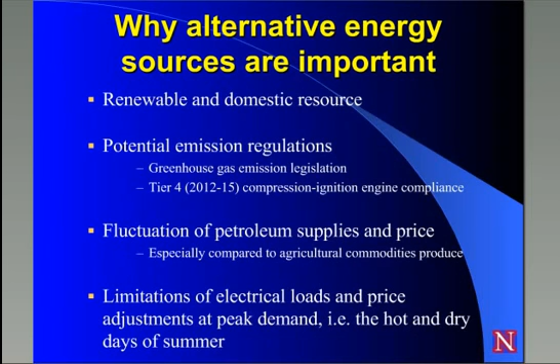Okay, so why are alternative energy sources important? One of the more obvious reasons would be the renewable domestic source. They also have the potential to reduce emissions, and that's important with existing regulations or maybe future regulations that monitor greenhouse gases, and meeting engine compliance, such as Tier 4 for a compression ignition system. The other reason would be fluctuation of petroleum prices and petroleum supplies. So that's just one other reason to look at that.

Specifically, if you're looking at irrigation and production for commodity crops, then if you would have an energy source that's tied to that commodity, it may be advantageous compared to something that's a petroleum-based product that may see spikes when your commodity prices don't rise. Now here recently, commodity prices have been tied much closer to energy prices due to the development of biofuels, so that's becoming a little bit less of an issue.

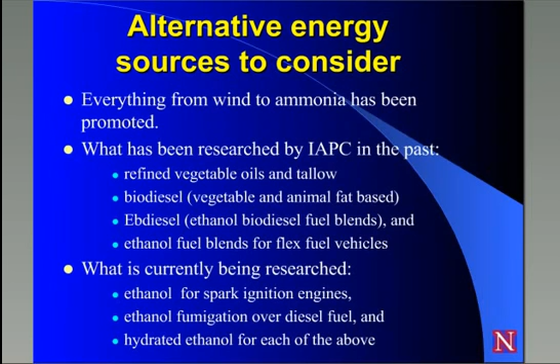But then specifically for the research project we were also looking at the limitations of electrical load and price adjustments at peak demand. And so if a producer was irrigating their crop with electricity, on the hottest days of the year, those are also the days that have the highest demand for residential and industrial cooling, and so the production applications may be limited on how much electricity they can use or the ability to irrigate their crops on the hottest days of the year. So that is a concern that some of the producers have, as well as the power generator. They're concerned about having capacity for people, or in some cases where they would have excess load and put limitations on their system.

As far as different sources to consider, if you review literature and things, many options have been presented, anything from wind to ammonia. And I listed those two as two that I find interesting, because when we think of it for crop production, I would rather be using the ammonia to feed the crop, and if I'm concerned about using electricity because I might not be able to produce on some of the hottest days, I would be a little concerned with wind as well, in that I might have to wait for the wind to blow in order to irrigate my crop. So lots of alternatives are out there.

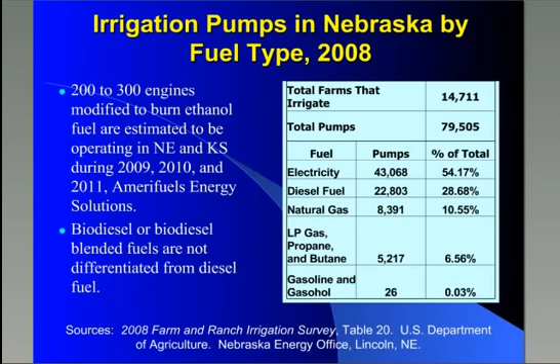Here at the Industrial Ag Product Center, we've looked at refined vegetable oils and tallows. We've also looked at the biodiesels from those feedstocks. We did some research in the past that looked at ethanol and biodiesel blends. This would be more along the lines of e-diesel, or in the study that we did, we looked at EB diesel. And then we've also done studies with flex fuel vehicles on the ethanol use of those various fuel blends as well. Currently, we're looking at research with ethanol for spark ignition engines, and then the fumigation of ethanol over the diesel into the compression ignition engine, and then hydrated ethanol as a source as well.

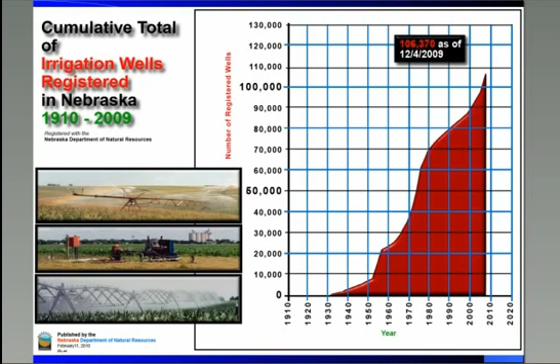So we'll get into some of that here, but I'll give a little bit of background information on why we looked at the irrigation industry here in Nebraska. That's that there's roughly 80,000 to 100,000 irrigation wells in the state of Nebraska for agriculture, and well over half of those are powered by electricity. But over a quarter of them are powered by diesel fuel, and then the remainder are either natural gas, propane, or gasoline. And the section for gasoline and gasohol, according to a 2008 study, is very small. It was less than 1%.

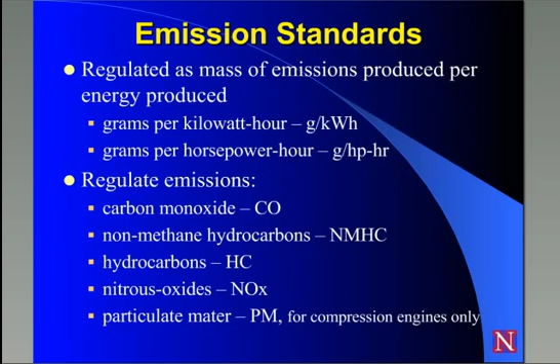Since then, we have had a company here in Nebraska, AmeriFuels Energy Solutions, and they estimate that they've placed around 200 engines in Nebraska and Kansas that are modified to burn ethanol, or combinations of ethanol and natural gas in a lot of cases. The other thing that's not denoted in this chart is that some of the diesel fuel could be biodiesel. That's not going to show up in these studies, but biodiesel or biodiesel blends would work in the diesel fuel category as well.

So, looking at the irrigation wells that are registered in Nebraska, this graph here just gives an illustration very quickly of how rapid the growth has been over the years, and where we're at in adopting more and more of those irrigation systems. And then if over half of those are going to continue to use electricity, then that's an issue for the power producers.

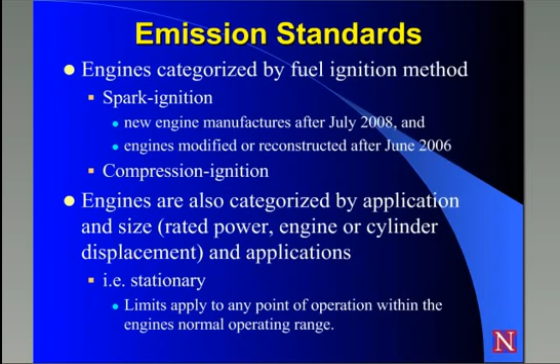I'll talk a little bit about emissions. Emissions are regulated by the mass per energy produced. So if we think of this in transportation energy, it's the mass of emissions per mile down the road. In stationary applications, it's either in grams of emissions per horsepower hour or grams per kilowatt hour.

The regulated emissions that we look at are carbon monoxide, and then there's non-methane hydrocarbons. In some cases, it just looks at the hydrocarbons. Typically, the regulations add those together with nitrous oxide as well, so that combination is regulated. And then in the compression ignition engines, we also have regulations on particulate matter.

Just as far as how some of the standards are laid out, there's different categories. The major difference is how the fuel is ignited. So you have spark ignition engines compared to compression ignition. For example, in spark ignition, new engines manufactured after 2008 are required to meet the newest standards, or engines that were modified after 2006.

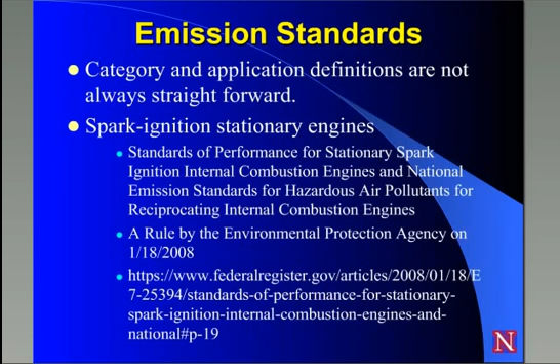So what is regulated is also categorized by application and size. On the size side, you might have that done by rated engine power, so how many rated horsepower, or the engine displacement or the cylinder displacement. And then in the applications, you have stationary, off-road, and on-road. There's also other categories such as emergency equipment.

But in the stationary example we'll be talking about for spark ignition, the limits apply to any point of the operation within the normal range. So in a road application, there might be a drive cycle, and you'd be looking at the emissions over a given drive cycle. In a stationary application, it's within the normal operating range of the engine.

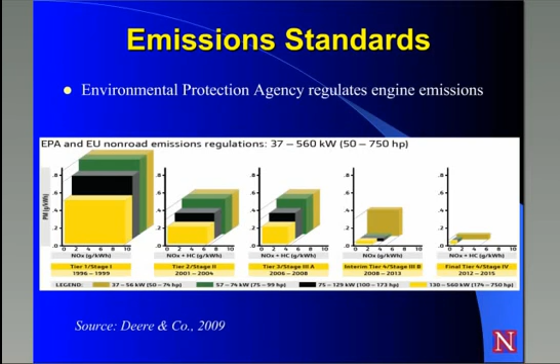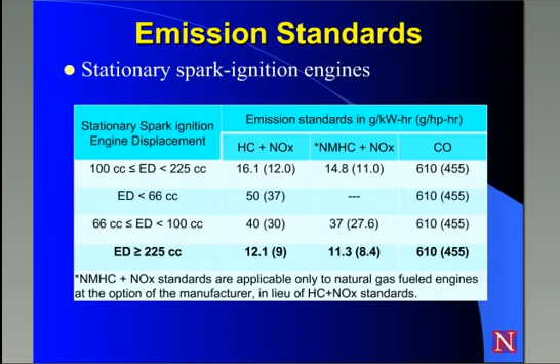I guess a summary on the emissions is that they're complicated to understand, and the specific standards are not always presented real straightforward. I'm giving an example here for spark ignition engines in a stationary application, and just the title alone: Standards of Performance for Stationary Spark Ignition Internal Combustion Engines and National Emission Standards for Hazardous Air Pollutants for Reciprocating Internal Combustion Engines.

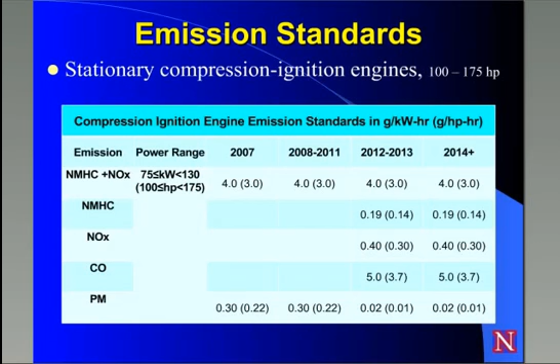I mean, the title alone sounds complicated, and then if you know that it's prepared by the Environmental Protection Agency and published in the Federal Register, it just gives you some indication of how complicated these documents might be. I did provide the website there if you want to review it in more detail. In this one, there's at least a half dozen to a dozen tables that talk about different situations within the stationary spark ignition engine.

So I did a little bit of summarizing here, but first I want to give you a little perspective on what's happened in the last 15 years in regulating emissions. This is an example from John Deere. They have one brochure that shows the Tier 1 emission regulations for a compression ignition engine. The boxes are fairly good size here. This specifically looks at NOx and particulate matter, but that's not the point I'm trying to make.

If you look at the far right of the graph, compare those small little boxes to the full-size boxes at the beginning. Over a 15-year period, we are really tightening down what's allowed to come out of these engines. So that's a challenge for the engine manufacturers.

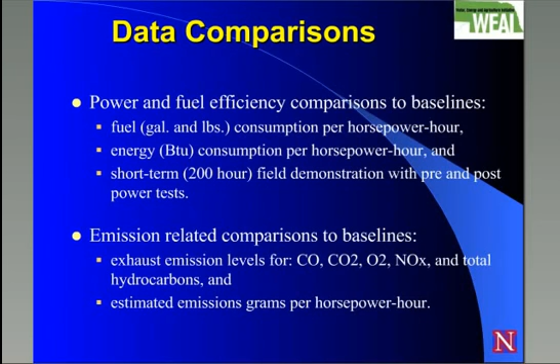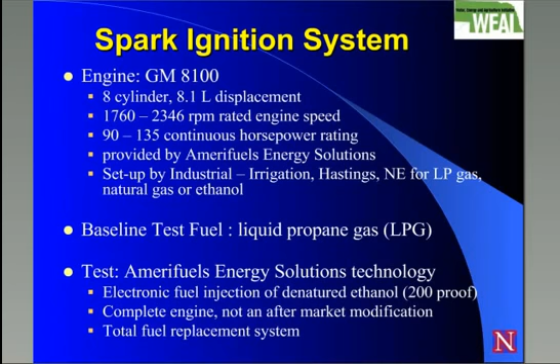The initial objective was twofold: laboratory testing and field demonstrations. So I'll provide some information on what we did in those areas. We compared the power output as well as fuel efficiency, so things like gallons or pounds of fuel per horsepower hour. We also looked at it on an energy basis, BTUs per horsepower hour, and we did the field demonstrations to look at short-term use. As you know, when we really talk long-term use, we're talking about 1,000 hours of operation, and the applications we looked at were anywhere from 100 to 200 hours in a summer.

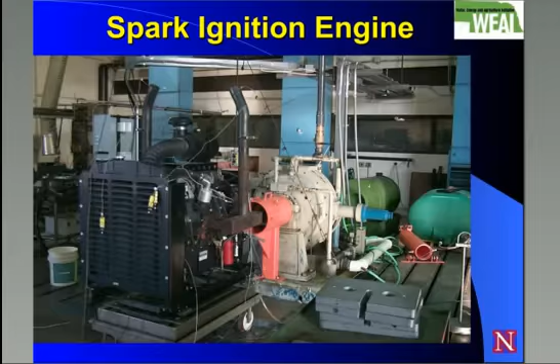We did compare the emissions with a 5-gas analyzer. If you reference EPA standards, our equipment wasn't sophisticated enough to meet their standards, but it provided data that was a good indicator of where these things would be from an emission profile standpoint. Lots of times the 5-gas analyzer would report a % of the exhaust stream or parts per million, so we could use that data and do calculations to estimate the emissions on a grams per horsepower hour basis.

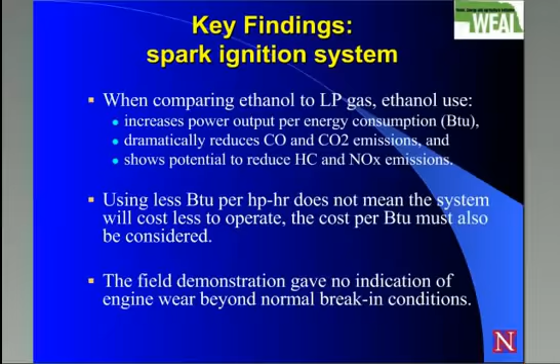As far as the spark ignition engine, I referenced earlier that we used an 8.1 liter GM engine, with a continuous horsepower rating between 90 and 135 horsepower. It was provided by AmeriFuels Energy Solutions, and the base test in the lab was with liquid propane, and then in the field we worked with natural gas so we could do combinations of dual fuel applications.

The technology provided by AmeriFuels was electronic fuel injection, and it added the fuel rail to the system, so it was a complete engine that they would sell and market. It wasn't an aftermarket product, and it would allow total fuel replacement, or you could use it in the dual fuel application as I referenced. Here's a photograph of that engine in the laboratory, as it was set up to do the lab testing.

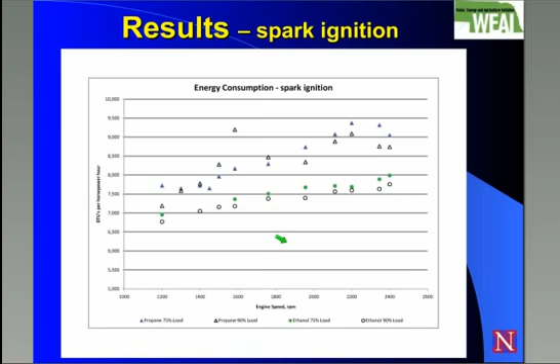And highlight some of the findings here, and then we'll look at some of the data from this test. But when we compared the ethanol operation to the LP gas, that's when it was burning on ethanol, it increased power output per energy consumed. It dramatically reduced the carbon dioxide and the carbon monoxide emissions, and it shows the potential to reduce the hydrocarbons and nitrous oxide emissions.

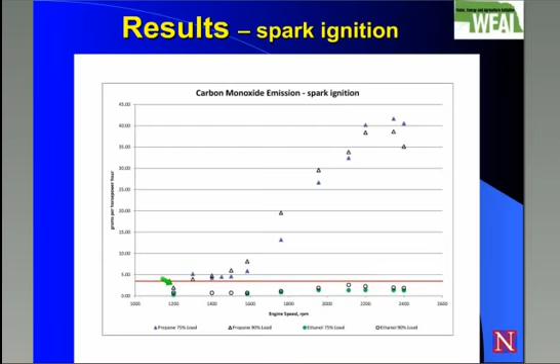Now, the one point I want to reference here is that it did lower the energy consumption, but less BTUs per hour is not specifically a lower operating cost. When we're talking about economics, then you have a combination of the engine efficiency as well as the energy cost for the fuel. So we'll talk some more about that towards the end of the presentation.

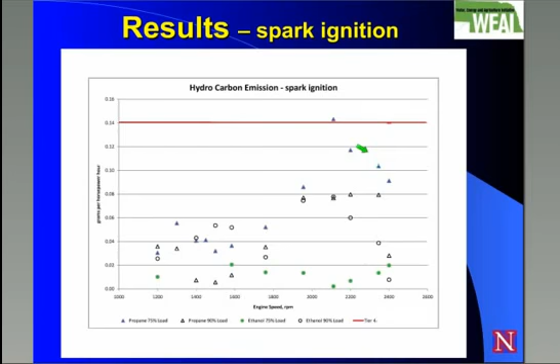In the field demonstrations, the engine and the fuels performed very well, gave no indications of engine wear beyond the normal break-in procedures, and no concerns for the operators. The farm managers didn't have any complications with the operation of the engine.

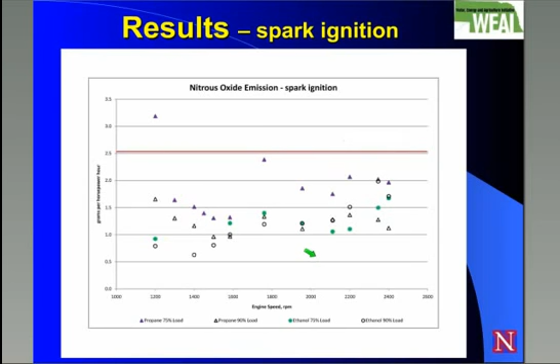Looking at some of the data that we had from this study in the lab, this one looks at energy consumption, and I will first highlight just here a little bit. The propane is represented in the triangles, and the ethanol is represented in circles. If it's colored, it was 75% of load, and if it's an open circle or triangle, it was at 90% of the load. So that allowed us to look at the operating range that is typically seen in an irrigation practice, that you're going to load these somewhere between that 75 to 90% load.

And at various engine speeds across the bottom of the graph here, and then BTUs per horsepower hour is what we looked at. So you can see, as I highlighted earlier, that we used less BTUs to produce a horsepower when the ethanol fuel was used than in the propane situation.

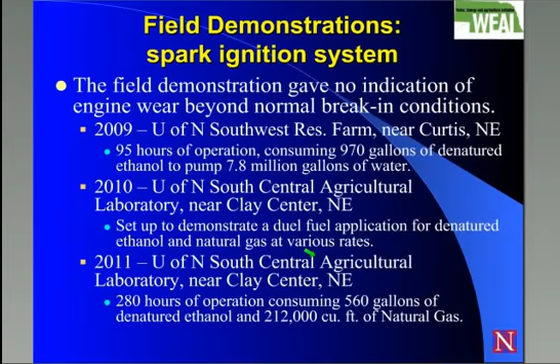Hydrocarbons, and again, the data wasn't quite as clear here, but we tend to see that the ethanol performed by having some lower, at least than these points up here where the propane seemed to get a little high, but hydrocarbons aren't really as critical an issue because that's usually combined with nitrous oxide, and in comparison, nitrous oxide is the more critical issue to control. And here again, you can see the different data points that show the circles are ethanol and the triangles are the propane.

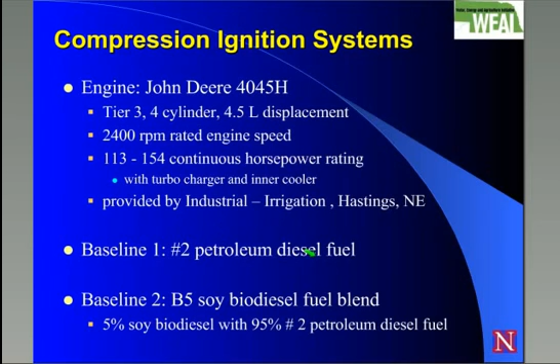So some of the things that we looked at from the field demonstration side of this engine: in 2009 we placed this engine out at the Southwest Research Farm near Curtis, Nebraska. It operated for 95 hours and consumed 970 gallons of denatured ethanol, and it pumped 7.8 million gallons of water. I'm not exactly sure how many acre inches that was for that operation, but that's just kind of an outline of what it did in that season.

In 2010, we set it up to do a lot of field testing, so it was demonstrated, but we did some testing with the dual fuel applications for denatured ethanol and natural gas combinations. And then this past year, it was at the Clay Center site again, and it operated on a set rate of natural gas and ethanol, operating for 280 hours, consuming 560 gallons of denatured ethanol and 212,000 cubic feet of natural gas.

An interesting point with the dual fuel approach is that sometimes in the use of natural gas, or if people have the opportunity to have wellhead gas, which is typically priced at very low prices, they have the opportunity to add energy into that system if for some reason the line pressure is low or the energy content of the gas would drop off on wellhead gas. It's not always real consistent.

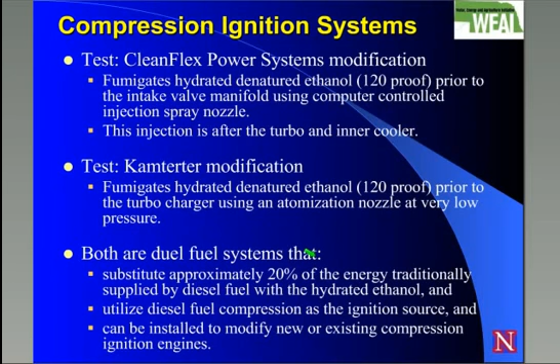So you can supplement that with ethanol fuel in the same engine and get maximum pumping or meet your pumping demand, where in some cases without ethanol, they would just have to back off the amount of water they could produce, and then their system wouldn't operate as efficiently, or their irrigation process wouldn't work as well for them. But with this dual fuel approach, they were able to maintain water pumping capacities.

As far as the compression ignition goes, we'll review that a little bit. We worked with a John Deere 4045H. It's a 4.5 liter engine, and we had two baselines that we looked at. We looked at a baseline with number 2 diesel, and we also looked at a baseline with B5 soy biodiesel. So those are our two baselines that we evaluated against.

And the biodiesel really performed at the same level. Again, it was only a 5% inclusion rate, but it really performed with no significant differences in the fuel output. So a lot of the graphs don't actually represent the biodiesel on the graph. But this is an example of the engine set up in the laboratory testing lab here.

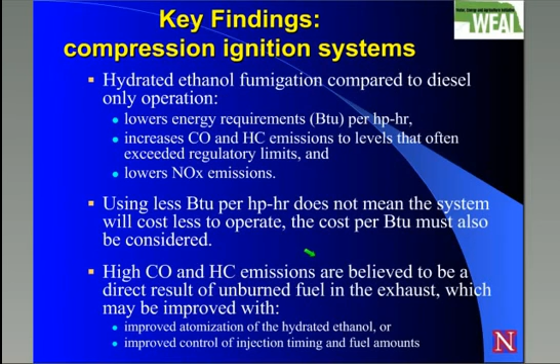Some of the different tests that we conducted: the CleanFlex power system fumigated hydrated ethanol, 120 proof, prior to the intake manifold, and it used a computer-controlled injection spray nozzle. This injection was after the turbo but before the intercooler.

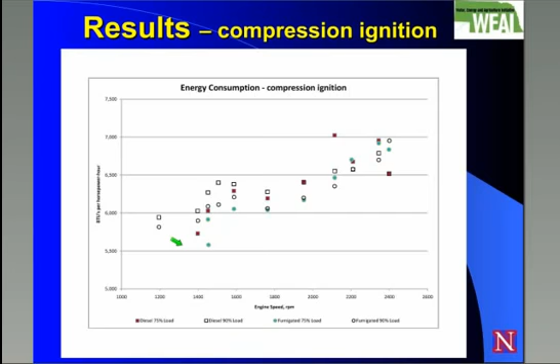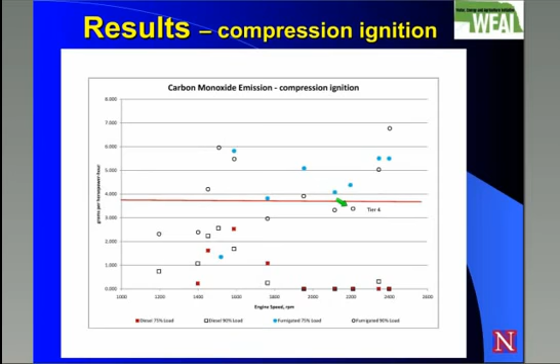They substituted approximately 20% of the energy that was traditionally provided by diesel fuel, and they also used the diesel fuel as the ignition source. So no spark ignition was added to these diesel engines. It was just using the compression of the diesel to ignite the entire fuel source. And in this case, these were installed on existing systems, so this could have been an aftermarket application.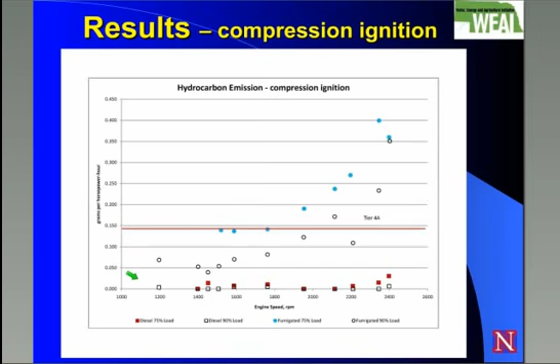Some of the findings we had there was that the hydrated ethanol, when we compared that to diesel only, lowers the energy requirement, so less BTUs per horsepower hour were used in that scenario. It did increase the carbon monoxide and the hydrocarbon emission levels, but it also lowered the nitrous oxide emissions. So in those cases, we had a benefit on the nitrous oxide side and some concerns on the carbon monoxide and hydrocarbons.

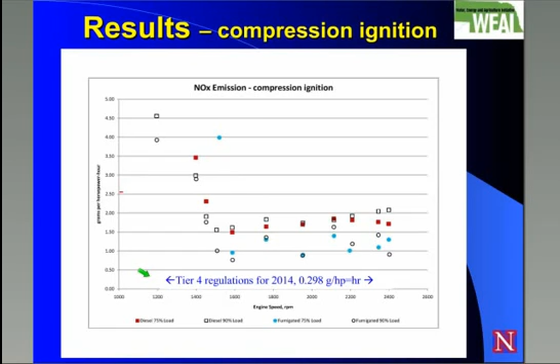And regarding the carbon monoxide and hydrocarbons, we believe that was a result of unburned fuel in the exhaust system. So there's probably opportunities to improve that with atomization and/or nozzle control, or the injection or the quantity of injection at the time. So that's a little bit on the concern with the carbon monoxide. We think that probably can be addressed with some product development, and the advantage being the lower nitrous oxide emissions and the lower energy requirements, and lower BTUs are directly related to lower cost.

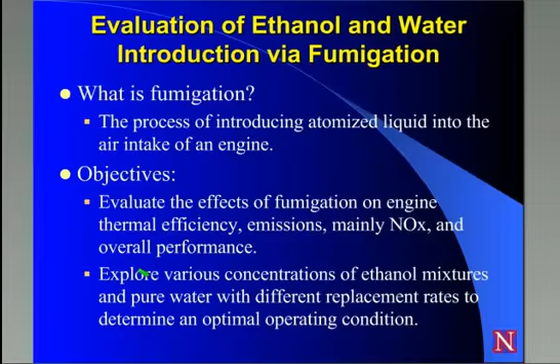So the carbon dioxide here, you can't really tell. It's not real significant differences, but a little bit on the carbon dioxide. If we look at carbon monoxide, we see that the ethanol tended to be above the emission regulations. And on the hydrocarbon side, we see a similar situation there.

And then on the nitrous oxide ones, we see that the ethanol seemed to have lower emissions of the nitrous oxide, but they still exceeded the Tier 4 regulations, which are coming up. That was kind of the target: could you add technology that would allow you to meet Tier 4 regulations without having to do significant modifications to the engine. But that's a pretty tight regulation to meet, and in this case, we weren't hitting that with the diesel alone clearly, and the ethanol fumigation didn't get it low enough either.

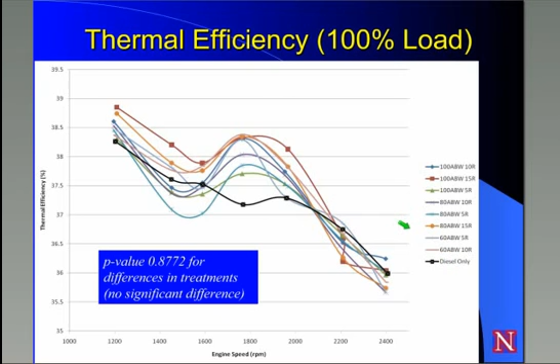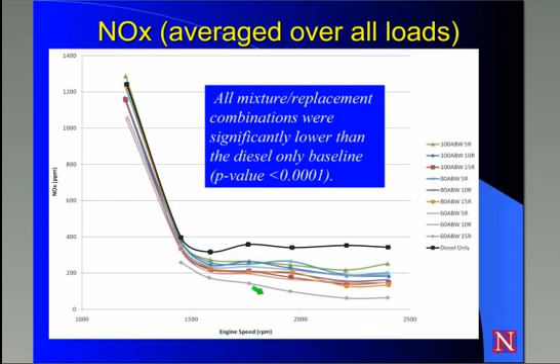There was also some additional work done on the ethanol fumigation side. A graduate student here, Grant Janosek, did some work for his master's degree dissertation. His definition of fumigation was the introduction or atomization of a liquid into the air intake of an engine. His objectives were to evaluate fumigation on a basis of thermal efficiency, the emissions, specifically NOx, which is the most difficult to control, and to explore the various concentrations of ethanol mixtures or pure water fumigation.

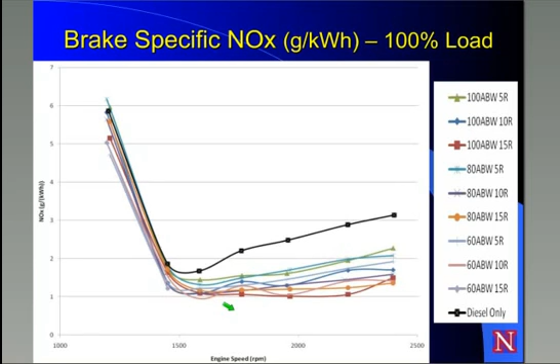We look at thermal efficiencies. Note the side of the graph here ranges from 35 to 40. So most of this operation was in a pretty tight representation here of 37 to 38.5% thermal efficiency.

And thermal efficiency is a measurement of energy in to energy output. So we lots of times think of the thermal energy that went into an engine, the BTU rating of the fuel, to the mechanical power output that we had out. So this is typical of what we'd see, even though we can observe some differences here at different points.

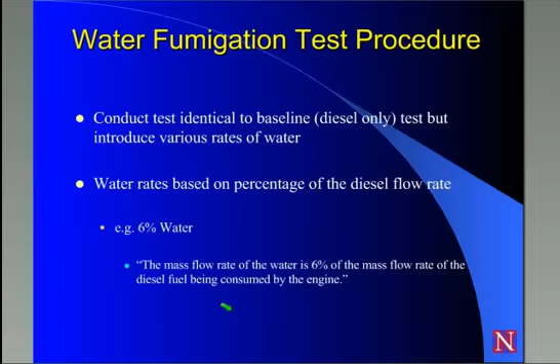The black line is diesel only, and the colored lines are different levels of that ethanol substitution. We had a couple different terms over here. So 100% alcohol by weight is denatured ethanol. 80% alcohol by weight is hydrated ethanol, so it's 80% alcohol, 20% water. And the 60% alcohol by weight was 60% alcohol, 40% water, which would relate to 120 proof ethanol. And then we have replacement rates at 5, 10, and 15%.

So if you looked at the diesel operation, we replaced 5% of the BTUs in a 5% replacement rate, and then we did that also to a 10 and a 15% replacement rate of the energy content found in the diesel fuel.

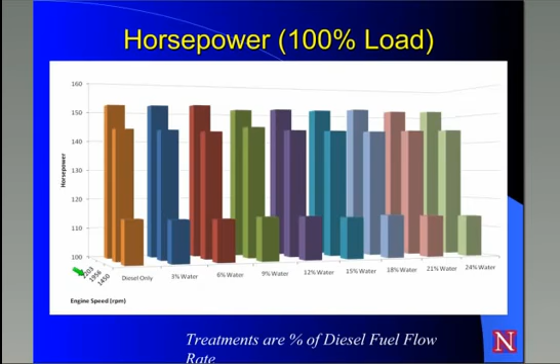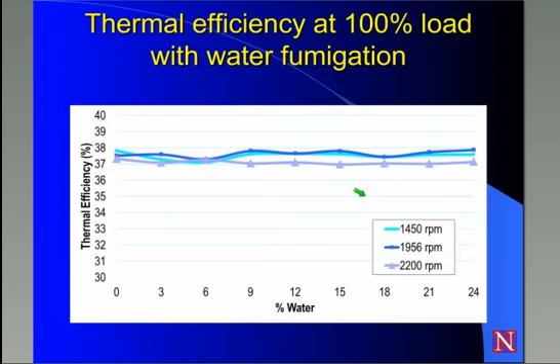So we look at nitrous oxide and we average this over all the loads. We have a significant difference in this case, that we were able to significantly reduce the nitrous oxide emissions from this application of fumigation. And that was pretty consistent; this was in parts per million. If we look at it in grams per kilowatt hour, you can also see that it's a little bit more dramatic in that effect, that the system does reduce nitrous oxide.

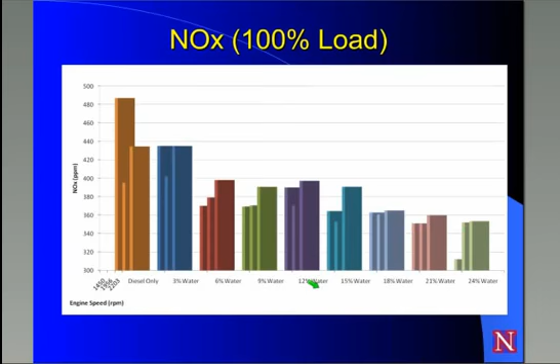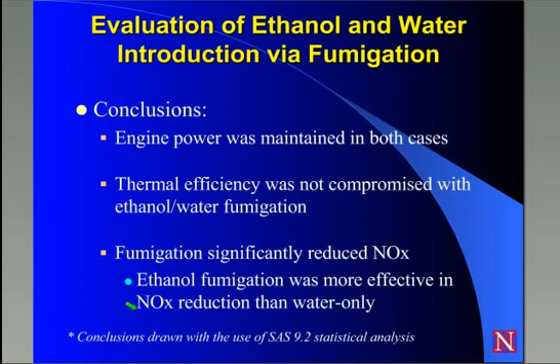As far as the fumigation test procedures, we conducted the test the same as the baseline diesel-only test, introducing the various rates of water through the air intake. So the water rates, this is a little bit different than the previous data. It's 6% water, but because water doesn't have an energy value, we looked at it as a mass flow rate. So in the 6% case, we supplied an equivalent amount of water comparable to 6% of the mass flow rate of the diesel being supplied.

So when we look at the data, you see the different categories. We did diesel only, which would be no water fumigation, and then we added 3% all the way up to 24% of the flow rate of the diesel fumigated through the air intake as water. So when we look at load requirements, you can see that we were able to maintain load as we added water. It didn't affect the ability of the engine to produce power.

The graph here represents different RPMs across the three different bars that are blocked out here. So that's at 1450, 1956, and 2200 revolutions per minute. And those are matched up to what we might see in irrigation applications.

And again, this is just another look at this, but thermal efficiency, the way we graphed this was again looking at the water rates across the bottom. The colors of the graph now represent the different engine speeds, and in all cases the thermal efficiency was maintained. So adding water in the air intake, basically changing the humidity of the air coming in, had no significant effect on the thermal efficiency of the engine.

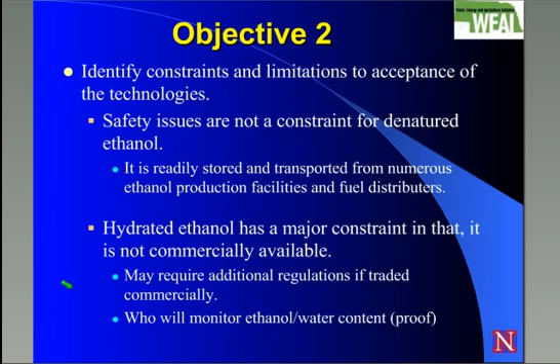So some of the conclusions that we drew from this study were that engine power was maintained in all cases, whether it was ethanol, hydrated ethanol, or just straight water. Our thermal efficiency wasn't compromised, so we were able to maintain the thermal efficiency of the engine with the fumigation, and it significantly reduced the nitrous oxide. And in this evaluation, the ethanol fumigation was actually more effective at reducing the nitrous oxide than water alone.

Looking at some of the other objectives we wanted to look at for the study of the WEAL project was constraints and limitations. One of the concerns brought up was safety with denatured ethanol, and that really wasn't seen as an issue. We talked to a lot of people from the environmental and regulatory side, as well as the transportation side. The product we're talking about is the same product that comes straight out of the ethanol plants. They have storage procedures and transportation procedures to deliver that product to regional fuel distributors. So delivering those to farmers wouldn't really be a different issue.

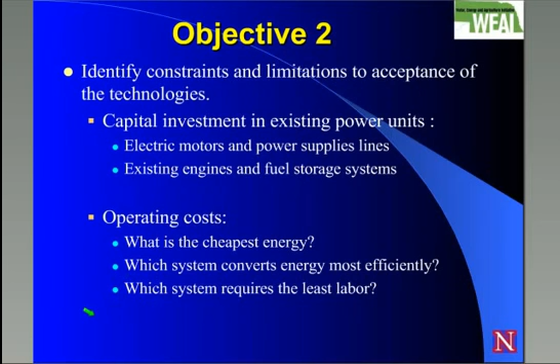Handling is always an issue; you want to handle the fuel properly, but it's not significantly different than what you would do for gasoline. Hydrated ethanol, on the other side, we did see as a major constraint, because it's not commercially available now, and it may require additional regulations if it's going to be traded commercially.

The idea of using hydrated ethanol is that if you're in a region that produces ethanol, they have to go through a significant effort to remove the water from the ethanol. They use molecular sieves, and before it hits the molecular sieve, it's about 120 proof ethanol in a lot of these systems. So there was some interest in whether we could pull hydrated ethanol off at that point and consume it; it would be a cheaper product than something that had to see further processing to remove the water content.

In some cases that may be true, but in a lot of these ethanol plants, they've already got the molecular sieves in place. So the economics of actually getting hydrated ethanol at a lower cost would have to be studied further. And then you're also increasing the volume and the weight that you have to transport. So it gets back to an energy density issue as well.

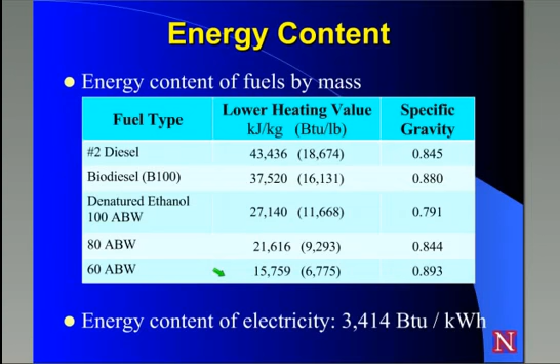Some of the other constraints we considered were the capital investment in existing power units. If you have somebody that's already got an electrical system in place, they've made investments in electrical motors and a power supply line, so getting them to switch to an alternative, there's going to be some considerations for capital investment. Similarly, if you have existing engines designed for, say, diesel fuel compression ignition and fuel storage systems, changing those systems would require an event to happen, whether that event is that the engines naturally wore out, or a significant reduction in operating costs or change in scenarios.

From the operating costs, I wanted to look at what is the cheapest source of energy, which system converts that energy most efficiently, and what are the labor requirements for the systems? Is it going to require additional labor, or have additional wear components on the engine? I referenced energy content several times, so we'll look here a little bit at this.

We have the energy content represented in kilojoules per kilogram or BTUs per pound, and diesel is the most concentrated energy source that we looked at, so you compare to that. The biodiesel number here, when I was preparing for this, was the number I found. That actually appears a little bit low. Normally we don't see that, but that is B100. The tests we conducted were with B5, so we didn't see this kind of a drop-off with the B5 blend that we evaluated.

On the denatured ethanol, we have straight denatured ethanol compared to the hydrated ethanol levels we worked at. When we started using the 120 proof ethanol, or 60% ABW, we were about a third of the energy of number 2 diesel. So in the cases where we were supplementing diesel flow, if we had reduced diesel flow by, say, 3%, and had to increase the energy supply with 60% alcohol by weight, that would have been a 9% increase in volume. So it got into an issue of a lot more volume of liquid fuel going through the engine.

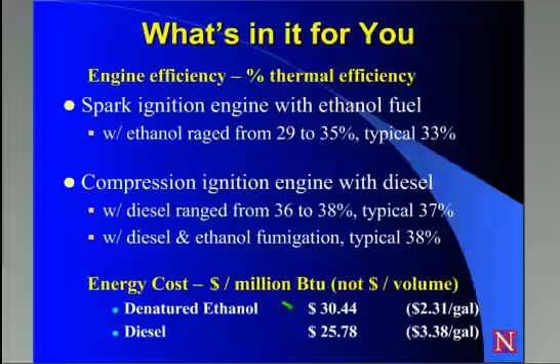So when I try to bring this back to how you evaluate this, or what's in it for the producer, look at the engine efficiencies over the range we tested. Again, this was one engine, so most of these tests would be better evaluated with a group of engines, but we just looked at one. Thermal efficiencies ranged from 29 to 35%. A typical spot we saw in the different work we did was 33 or 34% thermal efficiency.

On the compression ignition engine with diesel, it ranged from 36 to 38%. Typical, we'd say, would have been about 37. With the ethanol fumigation, it was really about the same thermal efficiency, in that 37-38% range. But when you look at the cost of energy, we're pretty familiar with the cost per gallon: diesel fuel is about $3.38 a gallon, and denatured ethanol at the rack is about $2.31 a gallon.

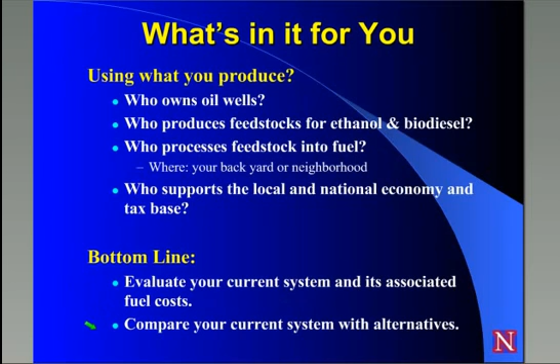But going back to the energy content and looking at these on a cost per BTU basis, or a million BTU basis as represented here, we see that it's an inverse situation. Diesel fuel is actually cheaper on a million BTUs than the ethanol is. So you'd have to use that situation combined back with the thermal efficiency of an engine, how well that engine converts that energy into mechanical power.

So in the compression ignition situation, where it's basically a similar thermal efficiency whether you fumigate with ethanol or not, there it may make sense to go ahead and fumigate ethanol if the ethanol would cost you less on a BTU basis. So if we had them priced the same, you might decide to fumigate the ethanol in it. If ethanol is higher priced, it may not be economical to fumigate in.

If you look at a comparison across the two engines, two technologies, with the spark ignition engine and comparing that to, say, a diesel engine, there you have two things that are working against the ethanol in this case. The engine isn't typically showing to be as efficient, and on a cost per BTU basis, the denatured ethanol is actually more expensive for a BTU of ethanol. So you'd have two situations going against you that you'd have to overcome.

Some of the things that we also want to consider in that situation, though, is where does the feedstock come from, or where does the energy source come from? In the case of fossil fuels, we're looking at petroleum oil that's coming from imported sources in many cases, as compared to biofuels, which are usually produced from a feedstock that's right here in our own backyard. So a local fuel, a domestic resource, and a renewable resource.